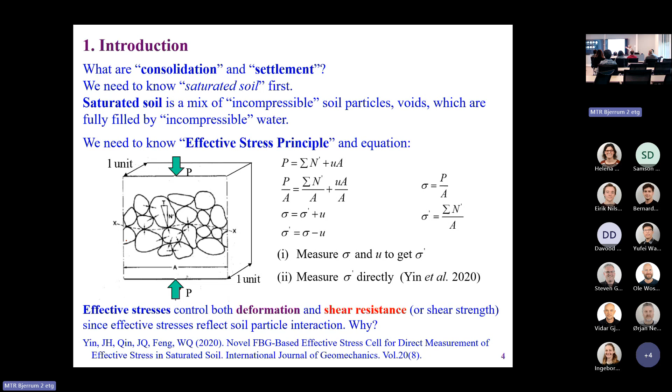I'll just mention a little - recently we developed a special fiber optical sensor-based transducer that can measure effective stress directly. It's a new invention that I will not discuss here. There's also the Terzaghi approach that follows. For the one-dimensional problem, the simple method is basically used; for 2 or 3-dimensional problems, the methods address 2- or 3-dimensional problems. I don't want to repeat this.

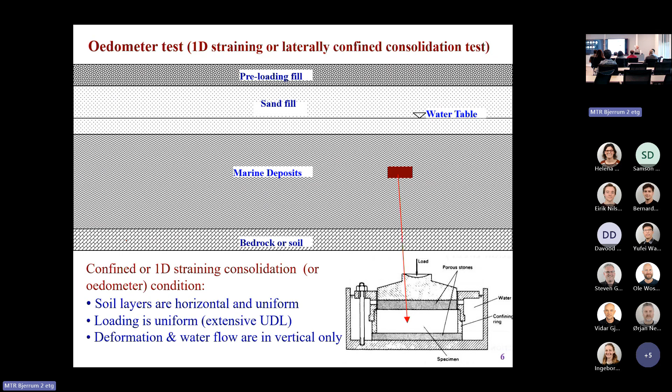I showed this slide another day already, so some slides I will skip quickly to save more time later. The consolidation problem is actually a coupling of the soil skeleton - this is very important, a coupling of the soil skeleton.

We can use a spring to represent the soil skeleton, with water in the voids. Basically it's a coupling of two components: skeleton and water, no air - this is for saturated soils. So any compression on the surface causes the water to come out. There's a spring, meaning the skeleton of the soil is compressed. It's a coupling process, and of course for soil the behavior is non-linear and also time-dependent.

So this spring for soil is very, very complicated - more complicated than an elastic spring, because the skeleton of the soil is elastic, viscoplastic, and non-linear. So this is just a symbol to show you the coupling.

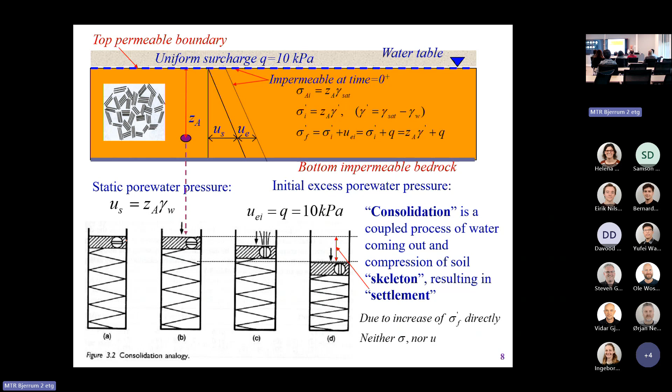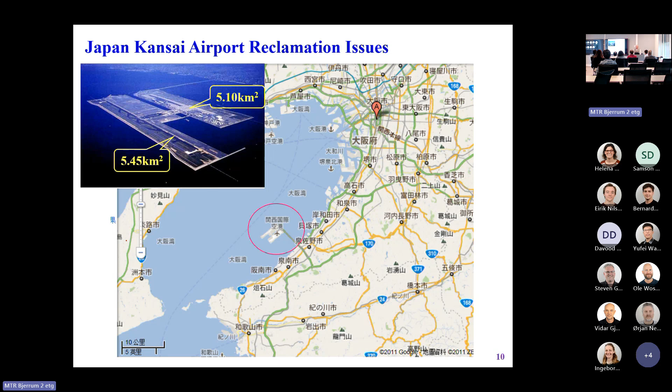The spring for soil is far more complicated. The settlement of Tower of Pisa is a good example, as is the settlement of two artificial islands. I mentioned this another day - hope you listened to my talk in Quebec City before. I'll go very quickly here.

For engineering design, it's very important to control post-construction settlement. What's the meaning of post-construction settlement? When the foundation is done, I don't want more settlement to occur after construction of the foundation, building, or facilities. This is really important for geotechnical design.

Anything that occurs before this, no problem. We even want the settlement to occur as quickly as possible, so the post-construction settlement is as small as possible. The problem is, how do you know the settlement before, and how do you know the settlement afterwards? We need a method - that's important. So we need a good understanding of the settlement deformation of soils, and how to calculate or predict the settlement for the whole life of the structures, from beginning to end.

I don't know what method they used, but the calculation is wrong. The real measured settlement is much bigger - up to 9 meters, 9.1 meters, even bigger - but the predicted settlement was only 6 meters. A big difference. This means something is wrong with the calculation method.

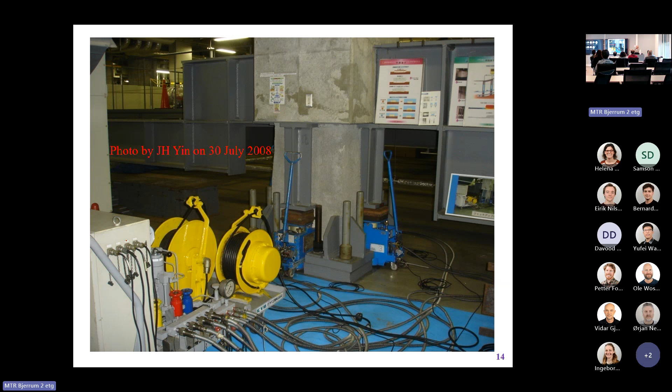So for the second runway, compared to the first runway, they waited a longer time to surcharge the soils. For runway 2, they surcharged the ground for a longer time, so more settlement occurred before construction. Finally, the post-construction settlement was smaller.

They waited longer for the settlement to occur, getting more stable, then started to construct the runways. This is a good choice - they learned a lesson from the construction of the first runway.

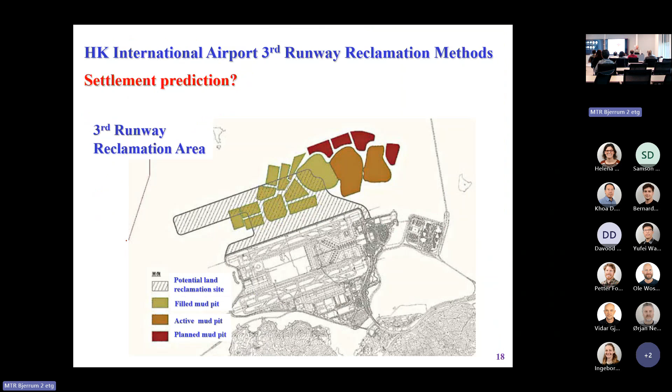Hong Kong settlement is also a big issue - I'll skip this one. The creep I mentioned before is a phenomenon. For example, in an oedometer test, we apply a load, keep it constant, then we observe the compression develop with time - lasting a long time, maybe 5 years, 10 years, even more. Of course it gets stable, no failure, because the oedometer test is a confined test - no failure, so finally stable.

Why do we have this kind of creep? I think it depends on the materials. For plastic materials, creep can also occur, but plastic is a one-phase material.

The soil has two phases: skeleton and water, different materials. The mechanism causing viscosity in soils is mainly due to physical-chemical reactions of the particles and water. The water molecule has two poles, positive and negative. The clay surface carries negative electrical charge, so water is attracted to the clay surface and cannot move freely. This happens on the particle level, and then on the skeleton level, it leads to this viscous behavior. I won't go into details.

So how do we know the viscosity of soils? How big or small is it? One simple test we all know is the oedometer test. We do the oedometer test at one stage of loading and keep it constant. When you compress the soil sample, we measure the vertical compression, which we can convert to the void ratio. The void ratio decreases gradually, on a log scale.

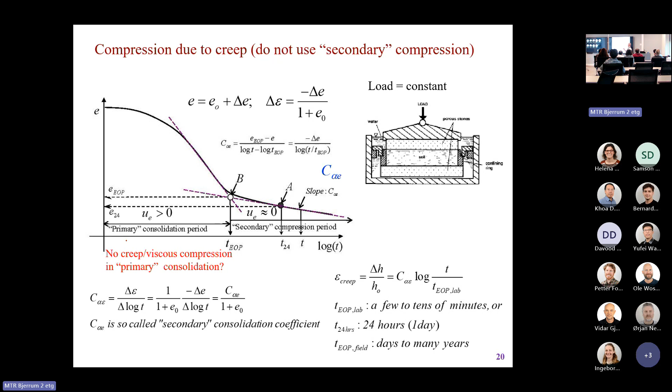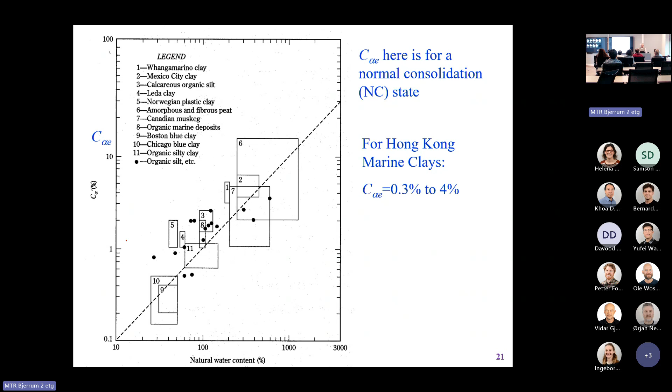This is what we have done for Hong Kong Marine clay. I don't know the details, but you can see the behavior can be a straight line. If the stress is very big, the slope gets smaller and smaller. It's not linear, and also creep. You can see here it's narrow, this is bigger, the line. It's not really parallel.

So I propose a nonlinear function to fit this kind of creep behavior. I showed Professor Hans Peter this morning this nonlinear function to fit this kind of nonlinear behavior. It's very useful. I don't know all the details.

Now, what is A method? What is B method? Here I'll discuss this issue in more detail. Last talk I mentioned it a little bit, I didn't go into depth, but today I'll go into depth and discuss what A method and B method are.

If you base it on A method, the assumption leads to an equation equal to this one. Say for one layer of soil, first we have primary consolidation. In sediment, we need to go up to here, up to here, up to here. The void ratio decreases, meaning compression. Compression is related to sedimentation, so this part is from here up to here.

So for the time, this is 0, bigger or equal to 0, to TEOP in the field, up to here. This EOP means the end of primary consolidation. At this point, excess pressure is about 0. The excess pressure here is bigger than 0.

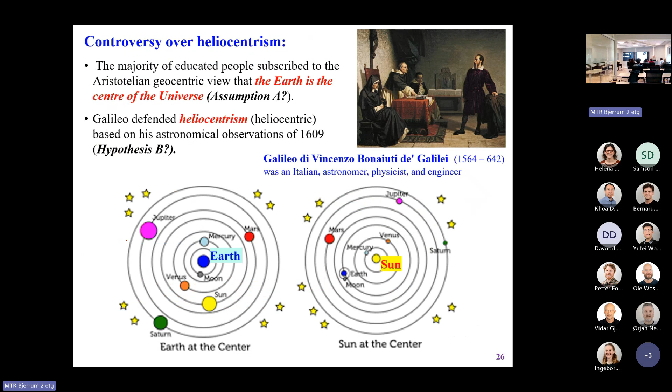So I want to go to detail. This is one contradiction. Okay, another one, go back a little bit. We have another contradiction: when the soil layers, at the beginning after applying loading, now the boundary—if this boundary is the drainage side, then that boundary will have effective stress increased to nearly the maximum immediately. So this boundary layer will have creep immediately. But the overall average degree of consolidation is much smaller than 50 or 60.

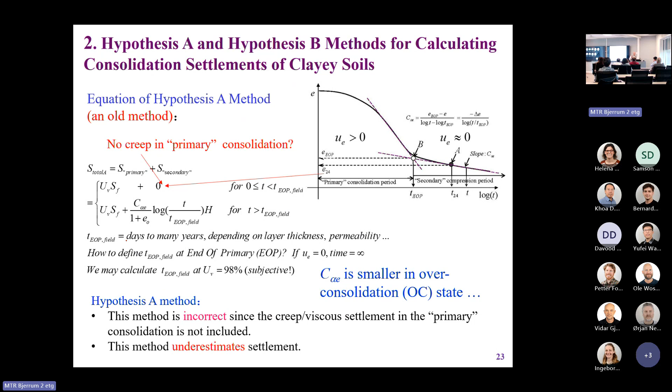That's another contradiction. I don't want to go to details. We can find another contradiction of A method. I don't go to those details. Let's skip this one—this is Dr. Degago's work.

Professor Hans Peter was his co-supervisor. He told me—he visited Hong Kong last year, so I invited him to give a talk. He also demonstrated, he proved A method is wrong. See, it's horizontal here, nothing to do with time. But afterwards, this A method, after this point, is time dependent. Before this point, time independent. It's scientifically wrong. It's not consistent. But B method, no problem.

B method comes to here, increasing this point with time, inside or outside, before and afterwards. This is the big difference—A assumption, B assumption. In A method, this curve in primary consolidation, in laboratory and in the field, has nothing to do with time. For any time, it's the same curve. But in reality it's different. So it's clearly a contradiction in the A method.

I don't recall details, but this is another explanation of the contradiction in the A method. I mentioned before: when you suddenly apply a load, then you start the drainage at the boundary condition—for example, just apply load. If this is a drainage boundary, the effective stress at the boundary will become constant immediately. But the pore pressure dissipation has not come to zero yet. So the effective stress increases to the constant immediately, then we have creep starting from here. But the average degree of consolidation is smaller than 100%, so we have creep here already, inside the primary consolidation period. This is another argument which shows the A method's logic and assumption is wrong.

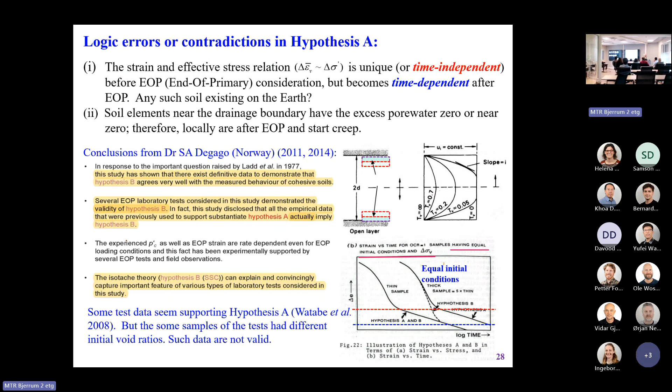So go back to the two methods. I won't read all of this, it's included in chapter 7. Before I introduce the simple methods, there are two methods: one is the fully coupled method. You already know this—people don't call it a method, people don't call it the B method, but the fully coupled method actually is this fully coupled consolidation analysis.

It's based on the continuous porous continuum mechanics. First, we assume the soil is fully saturated—this is not for unsaturated soil, only for saturated soil. Second, the soil is a porous continuum, because all finite element continuum mechanics is based on these two basic assumptions. Then we have other equations: consider the soil elements, consider stress equilibrium, consider strain-displacement relation, and consider the effective stress equation. Then we need a proper constitutive equation for the soil skeleton—we need an elastic viscoplastic model or the soft soil equilibrium model.

The soft soil creep model is in fact an elastic visco-plastic model. We call this a nonlinear rheological model. Then we need Darcy's law because of the coupling water flow. The water flow due to different hydraulic gradient follows Darcy's law.

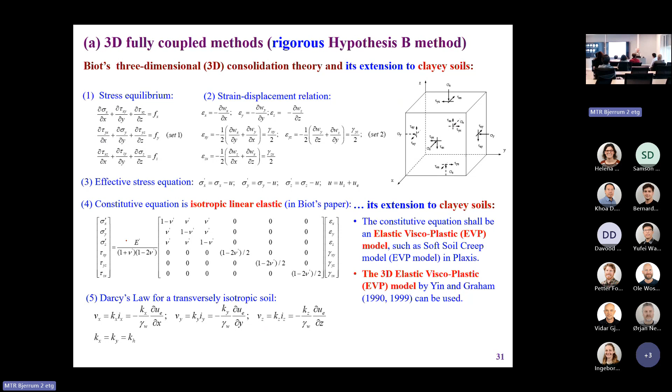I mentioned another day the soft soil creep model. In practice, my model and that one are very similar. I won't go into details.

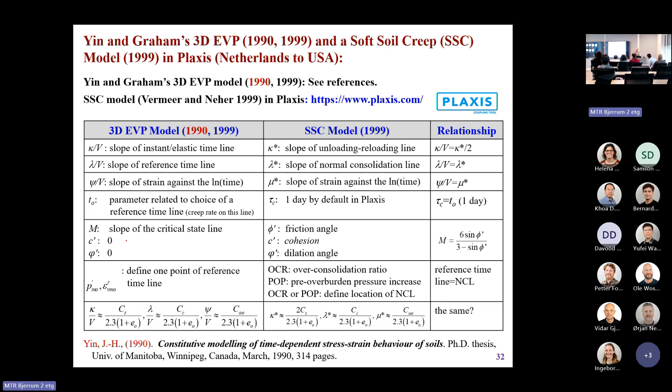For the one-dimensional case, we need a one-dimensional constitutive model. Again, the 5 equations are the same, but the constitutive model is a little bit different. This is a one-dimensional elastic EVP model, the one-dimensional elastic visco-plastic model by Yin and Graham. We combine them together to solve it.

Then the solution is based on hypothesis B. It's a rigorous hypothesis B. We don't have to make any stupid assumptions about this being primary and this being secondary compression. No need to divide this period. The solution is automatic, covering everything from beginning to the end. I don't want to go into details.

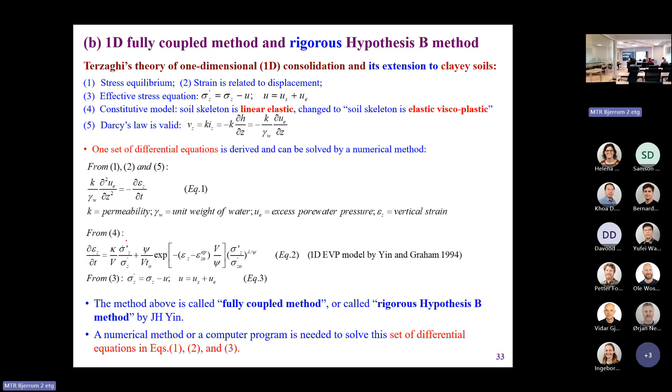Another interesting story I will mention: I believe in this world, the strongest supporter of hypothesis A is still Mesri. He's still alive and measuring, and his students also believe his approach is correct, including some people in Hong Kong in the government. I had some trouble including my method in the foundation manual in Hong Kong because one of his students had a strong view against my approach. So in this world, we still have some people who have old minds and wrong views, and they still want to keep them.

I hope the people listening to my talk today, actually Professor Dan Hansen, he already believes hypothesis B, so no need for me to convince you. For other people, you have an opportunity, listen to my talk, I hope you can be convinced today, and that you will convince other people to accept hypothesis B.

I tell you very frankly, I believe the strongest supporter of hypothesis A is still Mesri and his students. And some people support hypothesis B too.

I mentioned before, one Japanese professor, Watabe. Another big guy, a very famous guy, is Andrew Whittle. He's also a big guy, the head of the Department of Civil Engineering at MIT. MIT is a big university, and he did his PhD at Imperial College. But I believe nowadays people at Imperial College also support hypothesis B.

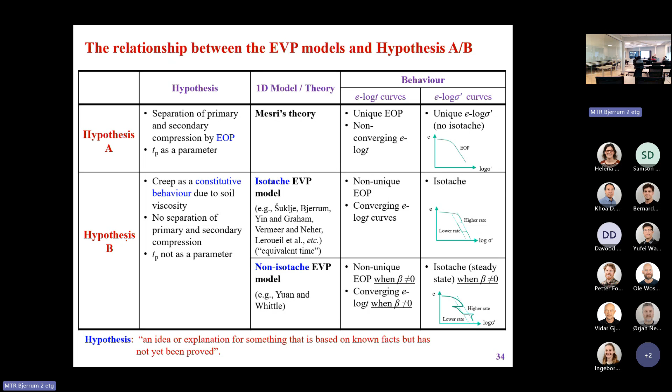So I won't go into details - this is some story I wanted to mention today. For the one-dimensional case, the fully coupled method for one-dimensional case, we use this elastic viscoplastic model, solving all equations together, and we get the rigorous hypothesis B solution. I won't go into details or the proof. That means for the one-dimensional strain consolidation case, fully coupled methods.

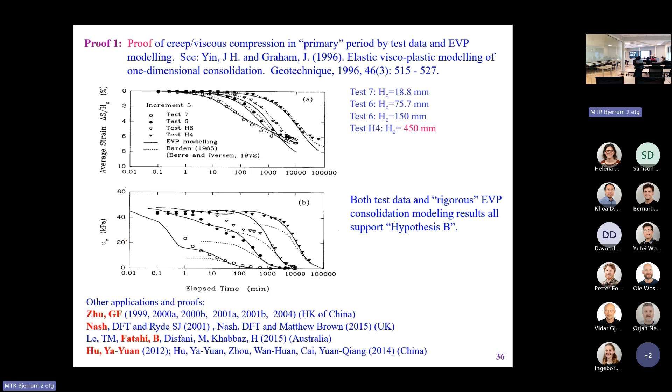We solved this in 1996, publication in Geotechnique. I won't go into details. This is a comparison of prediction and test data. I won't go into details. And some people use my model in Japan and also get very good results.

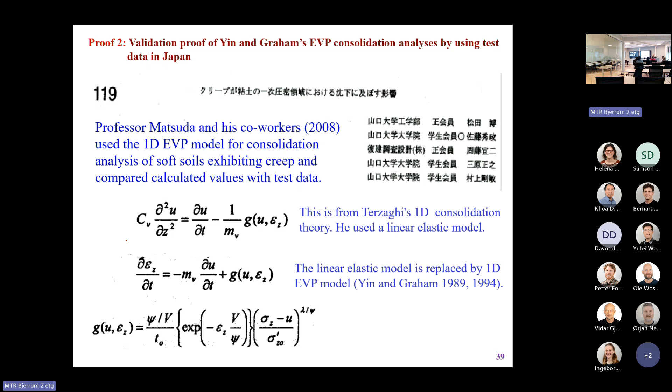This is for peat - in Chinese this is peat. Peat's behavior is highly viscous. You can see, if using a Terzaghi solution - because the Terzaghi solution assumes the soil skeleton is elastic, is elastic, so no creep is considered - then hypothesis A means at the end of primary consolidation we add a slope, that's the secondary compression.

So we have a method here: the initial solution is by Terzaghi, then followed by compression - that's the prediction. But the real data is shown here. So the Japanese professor considered my model fits the data much better, because my model considers viscosity and elastic viscoplastic behavior together inside it.

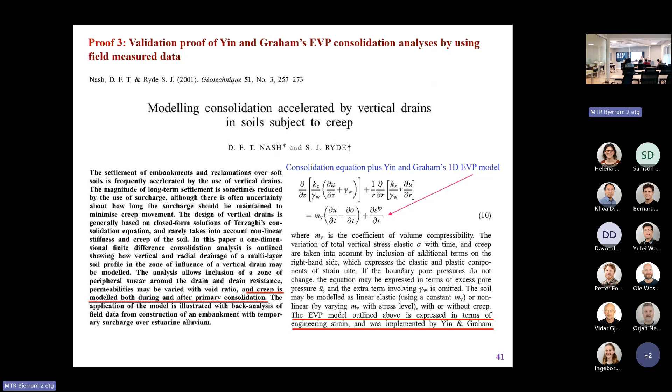You can see the papers - Professor Nash applied my model, and a professor in Bristol applied my model for the field condition. My proof and verification was based on laboratory data. I believe he was the first one to use my model for field settlement predictions, and he also found my model fits the field data so well. I don't want to go into details.

Fully coupled methods for one-dimensional, 2 or 3-dimensional cases are good, but you need computer software, a processor, and the knowledge to choose the right software and equivalent model in practice. You need experience to do so. For engineers, this is probably difficult.

So I was thinking to have a simple method which is accurate enough for engineers to use. I had this idea 20 years ago, but it was only realized a few years ago, 3 or 4 years ago. Finally I came out with a simple method that can be done by hand calculation or spreadsheet calculations. This is what I call the simple method.

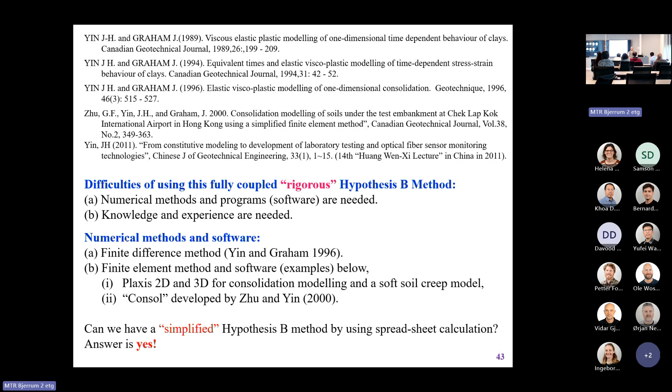Fully coupled methods are difficult to use. The simple method is here - that's the second part of my methods in the manual. Simple method is here, just adding here.

In the primary consolidation period, you have this - same as before. This one is after, when time is more than this. Just this item: U is the average degree of consolidation. You can get U from the textbook, from charts, or from some solutions.

S final can also be calculated easily, similar to the hypothesis A method. The difference here is the creep - this creep and S final I will discuss a bit later. Going into details is impossible today; I'd need 3 hours at least. Today I have 1.5 hours, and I want to leave more time for discussion, so I don't want to waste your time.

If you want to understand this method more, you can get my PPT papers from Professor Hans Peter, and everything here can be derived by hand based on our conceptual understanding. So my simple equation method is not empirical - it's based on my theory, based on the equivalent time concept.

Alpha and beta are a little bit empirical. I will show you why alpha beta is empirical, but this division actually is very good. And how do you calculate S creep? S creep final is something new here.

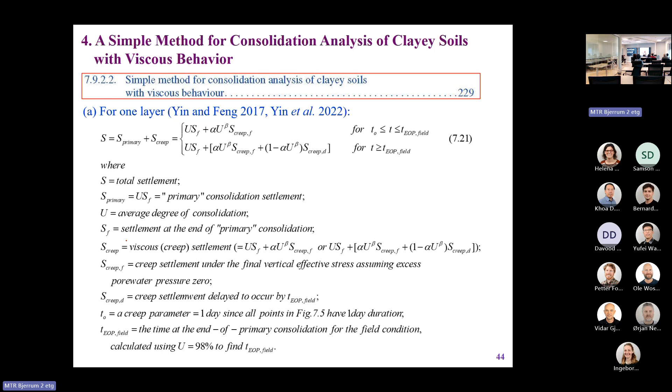In Terzaghi consolidation theory, you can determine U assuming the soil skeleton is elastic. That U is based on an analytic solution assuming the soil skeleton is elastic. But in reality, the soil is not elastic. In my method, we still use U. It seems a little contradictory. How to solve this contradiction, I want to point out. If you read the papers, probably you don't know the difference.

In reality, for example, compression increases a lot, so big. From here to here, the turning point, the behavior is nonlinear. To get the final strain, it's nonlinear. But when you determine U, we need to assume the behavior is elastic. In my equation, my simple method can consider nonlinear behavior. But when you determine U, you have to assume the behavior is elastic. How to solve this contradiction?

I'll tell you one small tip. This delta epsilon, from here to here, you can determine the incremental strain considering nonlinear behavior. So this delta epsilon already considers nonlinear behavior. The stress increase, no change. Then this MV is back calculated. This is a trick, it's back calculated. When you determine U, you need MV. So MV comes from here.

K is the permeability, we know it. The unit weight of water is a constant. MV is calculated from here. Then you can determine CV, the coefficient of consolidation. When you have CV, you can get U. So the simple method can consider nonlinear behavior, and at the same time we can get U based on the assumption that the behavior is elastic.

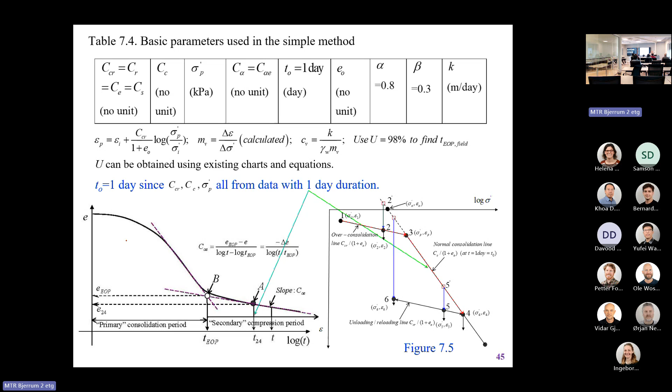The C alpha E is from a creep test from the normal consolidation state. But the same alpha E can be used through my equation, my method, also for unloading, reloading, even over consolidation points. All can be used. I won't go into details today, it's impossible. So all those parameters in my simple method can handle all complicated calculations - unloading, reloading, over consolidation, everything can be done.

Here I show you how to derive all the equations in my slides. You better get my PPT to see all the steps. All the steps, all items can be derived here. There's a concept.

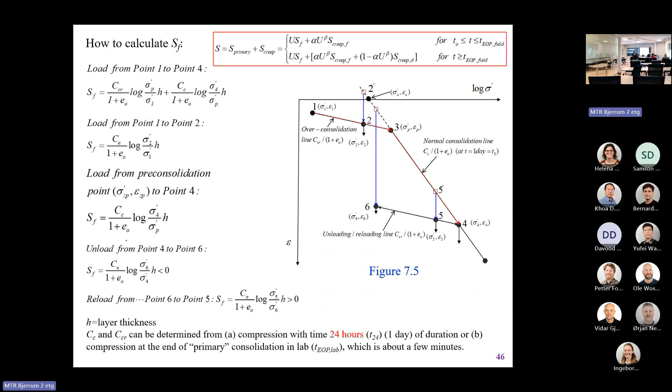Also including what's the equivalent time - I read Professor Hans Petter's paper, you also see equations for how to get the equivalent time, actually here. It's impossible for me to go into details. How to determine equivalent time, for example, what's the corresponding equivalent time at point 2. If we know the stress, we know the strain, then we can get this te2, because in simplified methods we need to know the equivalent time.

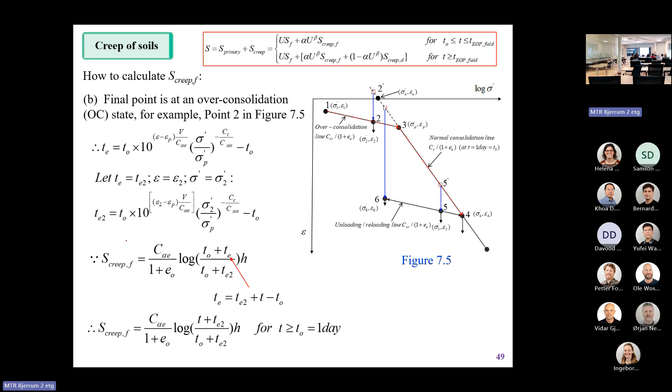It's impossible for me to go into detail, but if you read my PPT and my papers very carefully, you can see all the items can be derived - not empirical, not trial and error. It's derived very rigorously. I won't go into details.

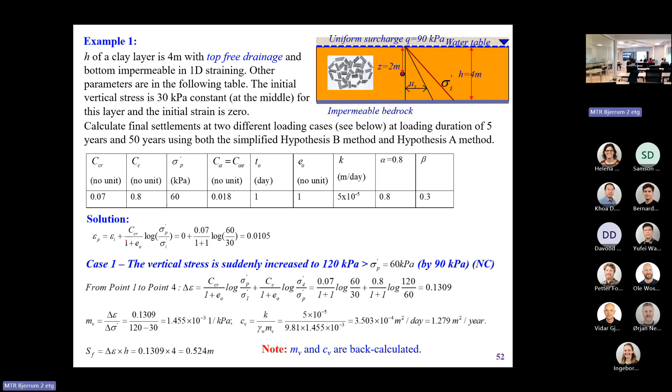How to consider it? Of course, one simple way is to consider one layer as a single layer, using the middle point - you see the middle point here - consider that to be the average initial effective stress, considering the whole layer to be a single layer. Then my calculation is here, I don't want to repeat it. That's not good enough. You can see all the results - I did calculations for method A, method B, all here, all can be done by hand.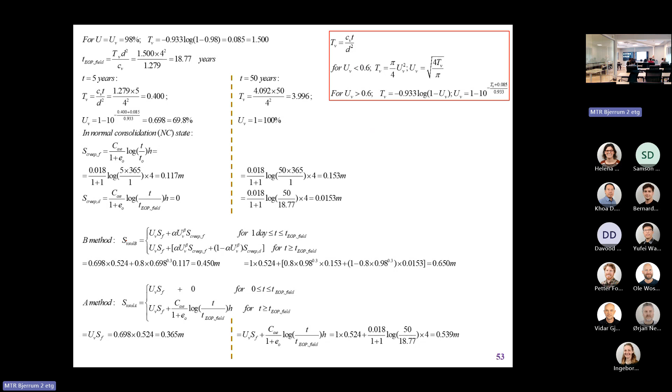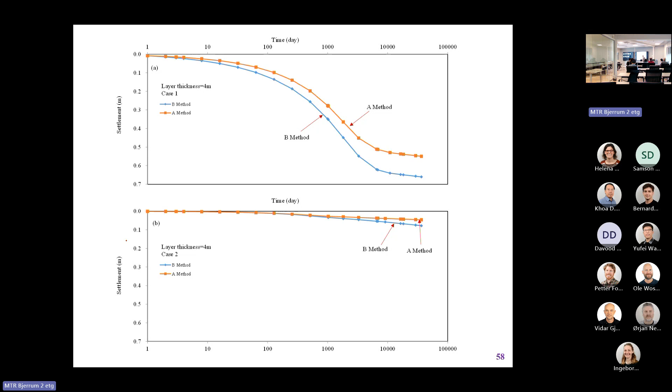Okay, you can see I skipped all the details. Method A underestimates the settlement, method B is better, more correct. This is for OCR equal to 1, normally consolidated case. This is for OCR equal to 1.5, an over-consolidated case. I won't go into details. Now, more accurate results. Okay, let me go back there.

More accurate results come from dividing into sublayers, because sigma v, sigma prime, is increasing with time. To get more accurate results, it can be divided into 2 layers, 4 layers, or more. I've done some calculations, dividing into 1, 2, 4, or 8 layers, to get more reliable results. You can see this increasing with time. In some cases we have multiple layers of soils, so you still have to divide into different layers. Dividing the soil into different layers is a very simple way to solve the non-homogeneous situation.

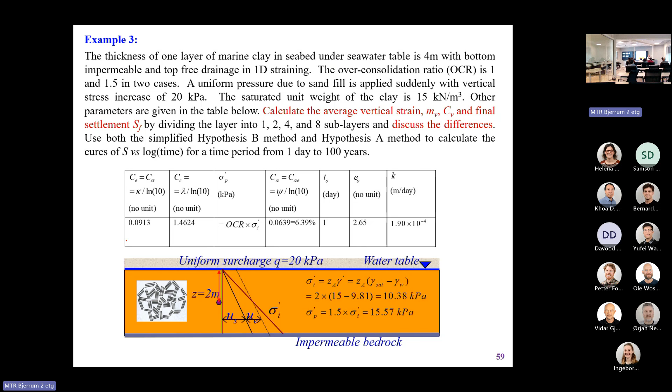This is to show you, for the simple case, sigma prime increasing with time and with depth. This is 1 layer, 2 layers, 4 layers, this is 8 layers. Dividing into more layers gives more accurate results. This includes mv, remember mv is back calculated, as I mentioned before. You can see when the number of layers increases, it gets constant at 8 layers. So for thick layers, or for multiple layers divided into sublayers, you can get a very reliable result. I've done all this.

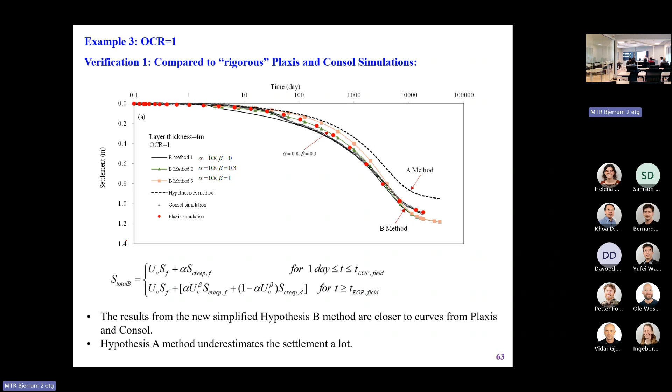This one basically affects the behavior in this area. Using this can fit the data in this area better, closer to the circle and triangular points, fitting the data from rigorous numerical methods better. That's why I say alpha and beta are a little bit like fitting parameters. You can play around with them. So this is a comparison. I won't go into more details.

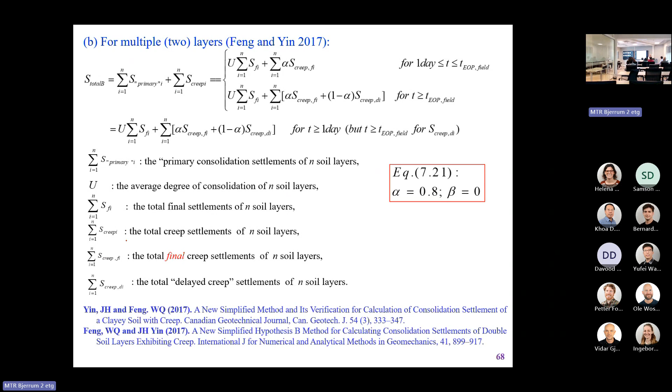And also for multiple layers, the same idea can be applied for the 2-layer case. I won't go into details. For the 2-layer case, again compared with Plaxis. You know Plaxis very well, so I won't go into details.

And vertical drains can also be included. If there's a vertical drain, as long as the settlement is uniformly settling down, you can just use the average degree of consolidation, considering vertical consolidation, and put it into my simplified method. Everything works very well. Another very interesting analytical solution, because in my simplified method I need Uv. We found another very interesting analytical solution from Walker and Indraratna.

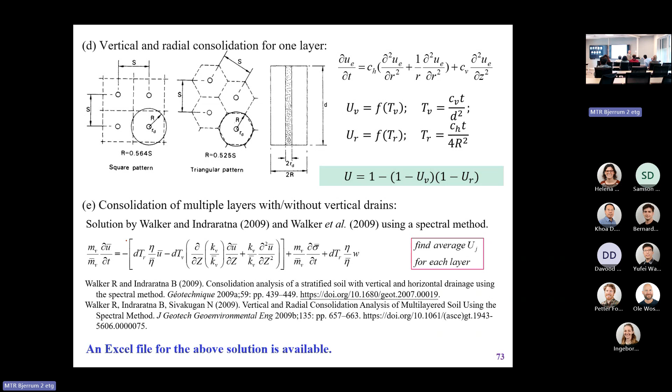Based on this equation, they can get the average degree of consolidation for any layers, multiple layers. Actually, if you want to know the analytical solution, you can use this Excel file based on this solution, you can get it from me if you want, my student made it. What I mean is multiple layers, and we have vertical drains, smear zone, any loading, and my general simple method is for this, for multiple layers. But you still need Uj for each layer. How do you get Uj for each layer?

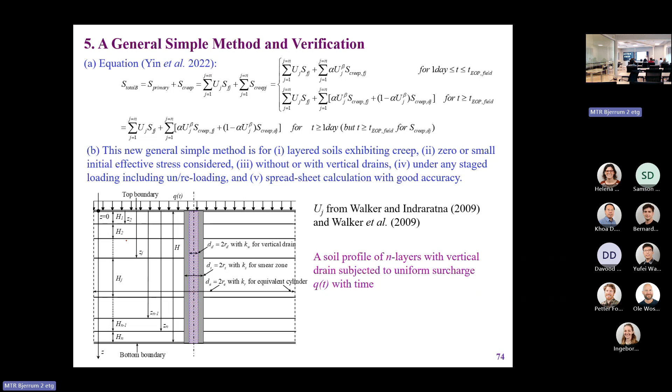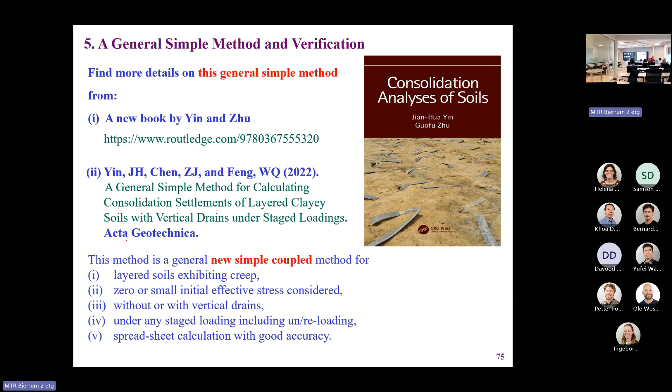You need an analytical solution, and fortunately the solution from Walker and Indraratna can provide this to us. We tried it, it's good, almost finished. We published a book, and you can get some solutions in this book. We also published a paper for the general case, which I won't go into details on, I need more time for questions. And we verified this general simple method for the multi-layer case based on data from a documented case in Hong Kong.

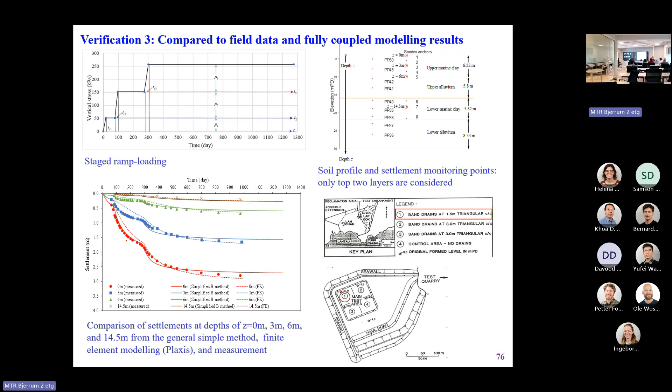Conclusions. I want to emphasize again: hypothesis A method alone is wrong, 100% wrong, and it can underestimate consolidation settlement. This underestimation is on the risky side, not the safe side. Risk is bad. The rigorous hypothesis method is the fully coupled method based on the differential equations, a full set of differential equations, but you need a computer program and knowledge to use it.

The simplified method B I've introduced very briefly today can be done by hand or by spreadsheet calculations, and it's quite accurate. We propose another more general method for multi-layers, vertical drains, and multiple loading, which needs more time to study and is a little more complicated, but can still be done by hand calculations. Settlements from the new simplified methods are in good agreement with the fully coupled method, meaning the simplified method is quite accurate and simple to use.

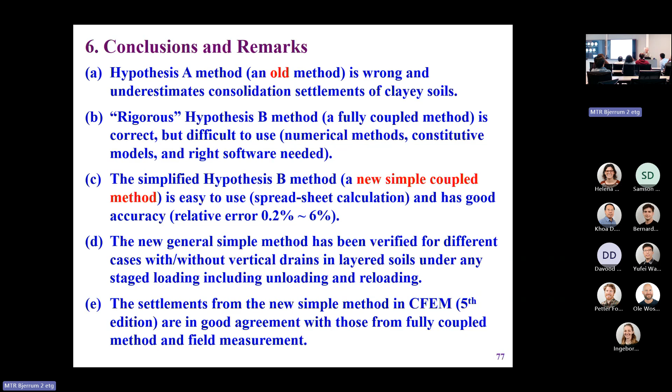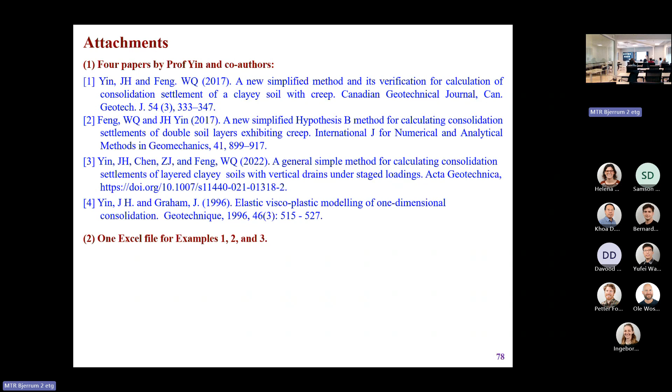And 4 papers, you can get 4 papers from Dr. Ray or Professor Hans Peter. And my Excel files, for examples 1 to 3, you can also get them from Dr. Ray and Professor Hans Peter. Okay, thank you very much for your attention.

Sorry, it's running over time. Very impressive presentation, thank you Professor Yin. Any questions about this presentation? Okay, this one. Gentlemen, no, lady first.

Okay, number 1, hypothesis B methods is used to calculate the settlement of the soil or the foundation or the structure of the soil, and can calculate settlement for the whole period from beginning to the end, including the primary consolidation period and after the primary consolidation period. So it can cover the whole period.

And you mentioned T90, T80 is not the main focus of hypothesis B. It's not the focus. For hypothesis B methods, one is the rigorous one, one is the simplified one. The rigorous one assumes the soil is a porous continuum and solves the full set of differential equations, but you have to solve it using a computation program. The simplified method is based on the same idea, meaning we have viscous compression in the primary consolidation period and also viscous compression afterwards. This basic idea is the same, but the method is simpler to use.

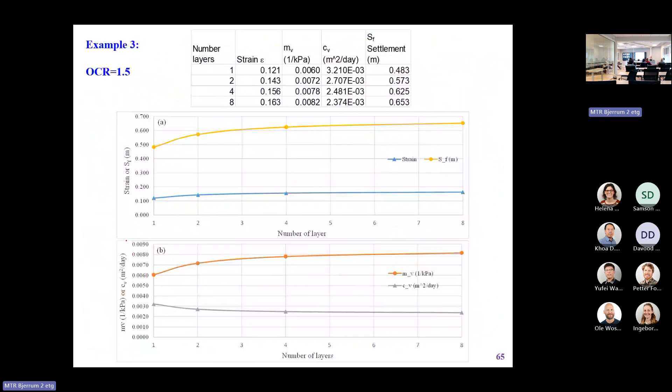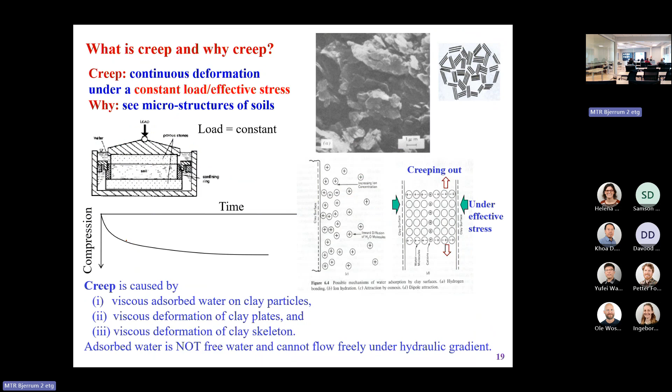One question to you is that you're using CC as a constant parameter. If you go with CC, agreed, but if you look at the modulus concept of Janbu, and the block sample database we worked with, it shows that CC is far from a constant parameter. You have to use the modulus concept to properly define the compressibility of clays, otherwise you miss important aspects of the soil behavior, and that would also impact how you deal with the creep problem. You need to go into the modulus concept and the creep parameters defined in relation to it, rather than using the old CC assumed as a constant value.

I fully agree with you. We also discussed this morning with Professor Peter that CC is not a constant. CC will decrease with effective stress. If you see the figure published by Dr. Bjerrum in 1967, you can see the trend is non-linear. So I fully agree, and fortunately I have done some work in this area already. I proposed a non-linear function to reflect this kind of non-linear compression. Today I have introduced this function to Professor Peter already.

Based on that non-linear function, I have also derived an elastic viscoplastic model, and put it into simplified methods as well. So my revised, updated methods can consider this nonlinear compression behavior, and also including creep. Creep will not increase indefinitely with time, it will end at a certain point. It's also nonlinear - I mean C alpha E is also nonlinear with time. It follows that everything is not as linear as you think.

You're right, so it's important that if you're going to have any kind of fully reliable method, we have to take care of the nonlinearity of the compressibility, even in the normally consolidated state, so to speak. Yes, I fully agree with you, so I have done some preliminary work in this area already. Good, so you can look into my papers. Okay, good, thank you very much.

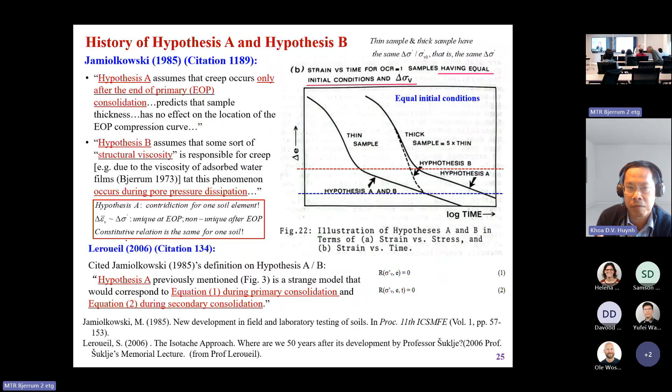I have a question related to creep effects under varying loading conditions. In your presentation, you showed two examples, I think one is the Kansai Airport and the other is the Pisa Tower. We see that significant long-term settlement was observed. So I'm wondering, how does your model account for time-varying loads, like seasonal fluctuation or repeated traffic loads?

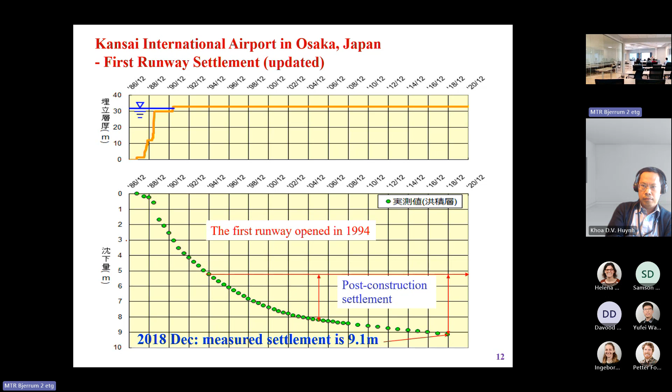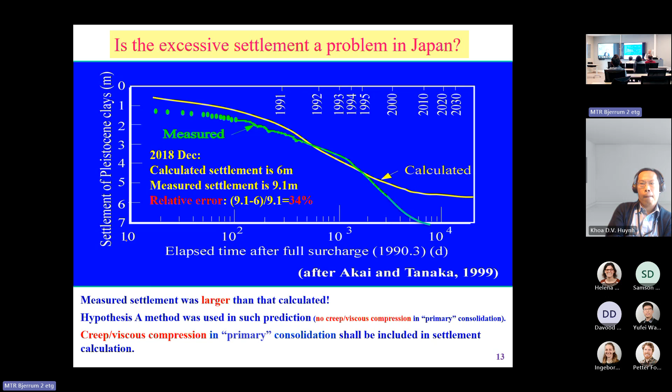In my presentation today, I also refer to Pisa Tower settlement and Kansai International Airport settlement. If you use my methods, it should give you better prediction of the settlement of Kansai International Airport. But Kansai International Airport is a little more complicated than just a simple one-dimensional case, so I have to consider 2 or 3-dimensional effects, something which I haven't considered yet.

Because you can see this is an artificial island, it's not a perfect one-dimensional compression, maybe a little bit 3-dimensional. So also multi-layers, and also creep consolidation. For a comprehensive, good simulation and prediction of settlement of Kansai International Airport, you have to consider also 2 or 3-dimensional effects, and multi-layers, the creep compression of the soils together.

Maybe I can add a comment, because you talked about having varying load in time. The way to solve that is you don't use physical time directly — you need to always update your time each time you change your load or effective stresses. So T doesn't start from something fixed; you don't use time as a parameter to control the creep, you use another parameter instead. Therefore you can always vary the loads continuously. It's not a problem, because you update your creep rate continuously. You can play around with it.

PLAXIS with the soft soil model is a good model, no problem. My simplified model, you can compare the two for some typical problems. My simplified model for the moment is basically for the 1-dimensional case — for sure, it cannot solve the 3-dimensional case, so you should be careful. Okay, Eddie, thank you.

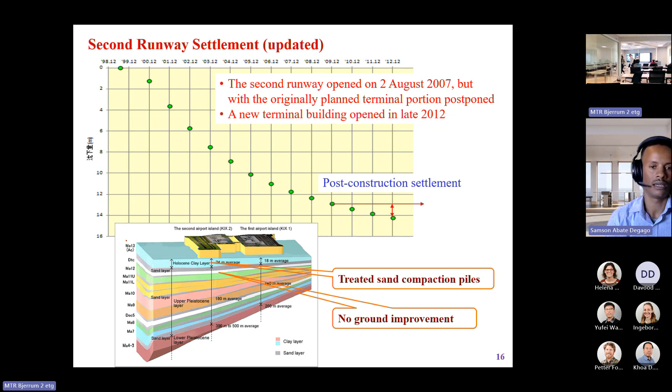So what I have is more of a comment than a question. I think education, like we discussed earlier, and dissemination, raising awareness, is very important because many are glued to this hypothesis A type of thinking. But one thing is sample quality, which is very important in this discussion of hypothesis A and B — hypothesis B needs high sample quality or representative sample quality, while hypothesis A has been using some disturbed parameters. I think it will be good to emphasize this with the simplified methods.

I fully agree with you. When you want to calculate the settlement of a real case, you first have to get high quality samples to obtain all the necessary parameters. So I fully agree with you. When people do this, I mentioned the example in Japan before — the data from Watabe, some data support A, some data support B. We did some analysis for all the data, but our conclusion was that actually all data supported B. Actually, for one test, the results were very strange.

It's very strange, we couldn't simulate it. One data point was very strange, scattered quite far away. Finally we contacted Professor Watabe, and he said, 'Oh, that data may be something wrong with the test, something unreliable,' and finally he asked us to skip it.

So sometimes the data given to you is unreliable for various reasons. More importantly, when comparing whether A or B is correct using test data, make sure all the test data are from the same soil samples. You cannot compare different soils with other soils and put them together, because the comparison should be on the same soils, the same quality soils, and under the same initial conditions. I remember in your paper you particularly pointed out that some soil samples had different initial conditions, but people put them together for comparison — because the soil behavior comparison at one point or another point becomes incorrect if you don't use the same initial conditions. So I fully agree with you: high quality sample is number one, then there are other factors we have to consider. Thank you, yes.

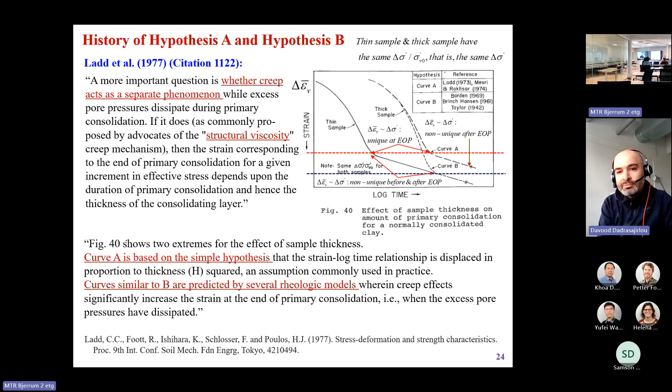Okay, the isotache model - what's the meaning of the isotache model? Professor Hans Peter can give you a better explanation. My understanding is for compression, the stress and strain compression, isotache model means for one line, the strain rate is the same. Or for this line, we have parallel lines with different strain rates. So that's the basic idea.

This viscoplastic strain rate in different lines, the vertical strain and vertical stress is dependent on the strain rates, with different strain rates. So that relationship is unique.

That means initial loading, unloading - it is, but that is the assumption. So that was the reason why we were doing tests to check this. We were checking what was the difference, what was the history effect of coming to different isolines and isotaches, whether we were creeping with constant stress and time, or whether we were unloading. So we did this in a way - we have a paper investigating exactly this, whether this is a totally unique relationship independent of the history of how you reach this isotache.

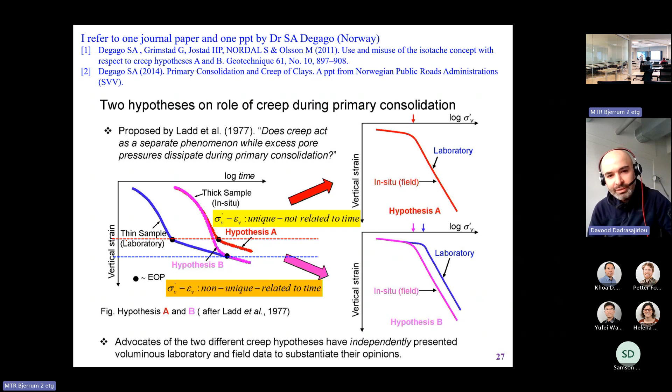Exactly, history, yes. Recently the MIT group also published a paper, a new viscoplastic model that connected hypothesis A to hypothesis B because of this issue. One issue was that because the initial stress in the ground is over-consolidated somehow, during the loading, hypothesis B produces a higher strain rate because it quickly gets to that unique ratio between the rate and loading, but hypothesis A is behind. So they introduced another factor, kind of like R. It just sounds to me ad hoc, but anyway, it's related to the rate of loading.

This is, I think, worth looking at in my opinion. And another thing was about unloading, the amount of unloading - is it isotache? For example, if we unload the sample from the consolidated state, a large amount relatively, is it following the isotache method? I mean, is there a unique relation also there between rate? For the unloading, the creep rate is smaller - it is smaller, even zero.

If you see my screen - share the screen - you can see this item. I don't know how to, maybe you cannot see that. Okay, you can see my elastic visco-plastic model on the screen. The second part is the viscoplastic strain rate, which is dependent on the strain and stress only. This strain stress can be in the normal consolidation state, or can be in the unloading-reloading state. So this model can show you that in the unloading-reloading state, the visco strain rate is smaller. It's smaller, okay? So the model can handle this, but this model still needs some improvement when the unloading is huge - that's another story, I don't want to get into that now.